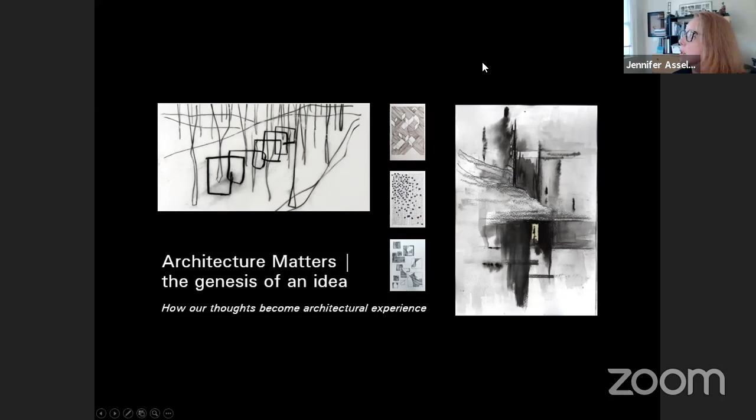So with that, I'm going to turn this over. These are my image credits, because in architecture, it's always important to make sure that you acknowledge where your sources come from. With that, I'm going to turn it over to my partner and colleague, Doron Serban.

Hey, everyone. So this question is kind of a loaded one. It's both, what do you think you need for tonight, but then what do you think you need when you are practicing architecture or doing architecture?

So Jennifer, if we go to the next slide, this is what everyone kind of thinks is required, which is this beautiful set of tools. And you've got all these different pens and pencils and sketchbooks and markers and stuff that can cost a lot of money. Some of it looks like it's homemade, but in actuality, yes, these are great things to have, but they are completely superficial. They're unnecessary. All you really need is something to draw with and something to draw on.

If we go to the next slide, you can see that this is the other kind of myth of architecture, that you have to be some fantastic artist. There are many architects that can draw well, but not all architects are beautiful artists. And really what this talk is about is showing you that the formulation of an idea, the way you put down your thoughts onto paper and that they're exploring something, is much more important than producing a beautiful sketch.

So whatever tool you have in hand is useful. I grabbed a couple that I have on my desk right now, and you'll see that in grad school, I was forced for a long time to use a fountain pen, even though I worked for Autodesk. They're like, no, you have to do fountain pens. I like to carry this giant marker around because sometimes it just forces me to draw in different ways, or a pen, pencils. I have drawn with food on more than one occasion. I'll draw on too many surfaces.

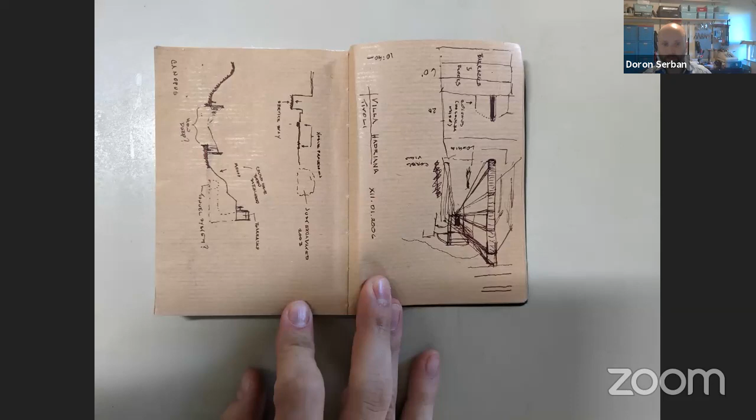Sometimes I wouldn't have the same tools. In this case, one of the things I liked about fountain pens is I can get my finger wet and then start using it as a fill. If I wanted to highlight something, I could use a different color, so I would carry around some colored pencils. I liked using brown paper at different times because then I could play with getting darker or lighter, again forcing my brain to think in different ways.

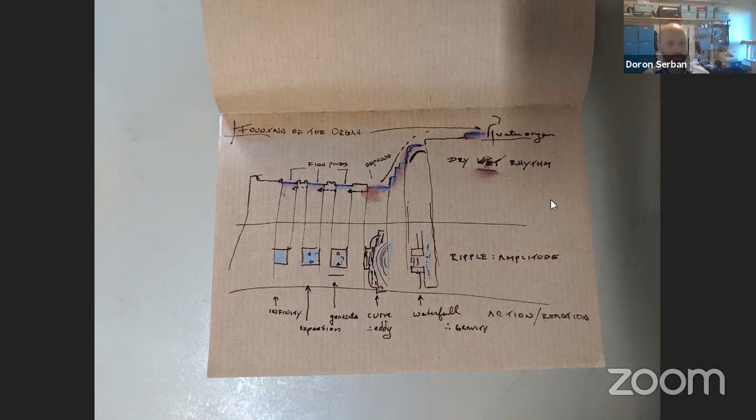All right, and this is kind of the quintessential architectural sketch. In some other professions this might be a mood board or ideation, but for us this is really showing someone's brain going on overdrive, trying out different ideas and filling in every square inch of the page trying to figure stuff out. I love this because you see the different ways shading happens - some horizontal, sometimes it's like, I don't have time to draw everything.

This is an anonymous image we found, not any one of our personal works, but we get a sense of the attitude, the interest in overlapping ideas that aren't necessarily clean. You can see the person drawing over things - they're uninterested in making things look very clean and very perfect. They're much more interested in getting the idea down and really understanding an idea or a topic.

All right, so that is to say - I hate the word pretty, and I always ask my students to avoid using pretty or beautiful or nice, because it doesn't mean anything. It's not a conversation. You can like it or not like it, but there's no way to have a conversation.

Instead, what we want is something that's productive, meaning you have a question. The drawing is meant to explore the question - is it moving us forward? A productive drawing is one that gets you closer to understanding. Now the understanding might be another question, and in most cases it usually is, but that's what makes it exciting.

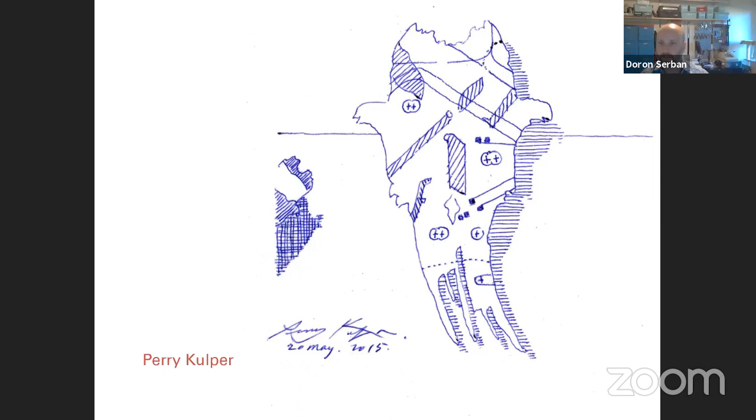Okay, so I'm going to change my tone - going from super hyper excited to see you guys to kind of much more therapist style. So go ahead and relax. It's the first thing - bring your energy down, excitement up, maybe find some way of doing that. Grab whatever it is you want to draw with, and something to draw on. Let's just explore, let's see what happens.

All right, so we're going to go through a series of 12 exercises, and there is no right or wrong. If you have a question about it, just use your instinct. Remember, it is literally impossible to do anything wrong other than just not draw anything. So even if you draw something you think is completely wrong, no one's going to know - it's just between us, so don't worry about it.

And we're going to spend about 60 seconds for each one. So the first thing we would like you to do is draw a circle - easy enough, but you can only use up and down lines, so vertical lines.

You're going to have 60 seconds to do it. In some cases it might take you 3 seconds, and in others it might take longer, so it's kind of that gauge. But if it does take you only a couple seconds, go ahead and try to do another one, and try to do it differently while still doing the same thing, and see what you get out of it. You guys ready? All right, we'll put 60 seconds on the clock and go.

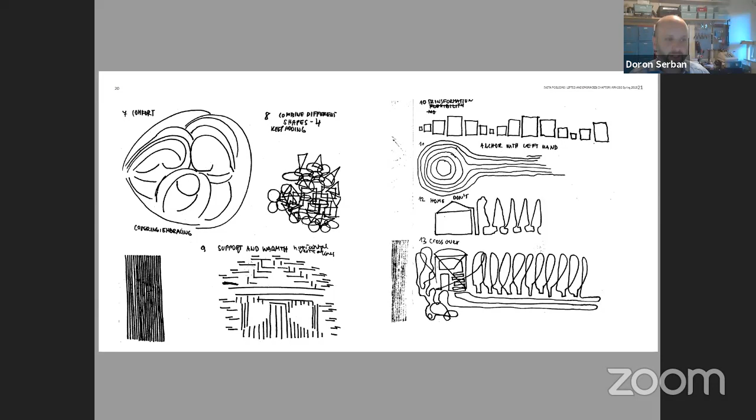What we wanted to show you guys is a couple examples of the same students we showed you earlier, but this is kind of how they work through their ideas. And in my studio, what I find always interesting is you can tell a lot in the drawings. In this case, I believe this is Iveta. She has a very strong, what we call a strong line. She doesn't have a lot of little choppy repeats, but the lines she draws, especially that bottom left one, is talk about confidence. She's drawing it down, there's no hesitation. And then I love the way she drew comfort, this idea of kind of almost enveloping. I've never seen anyone do the home that's not vertical when they do this exercise, a little house with the trees.

And if we jump over to, I believe this is Connor. Now, Connor is a very inquisitive guy, but he's also very self-conscious about his drawing, and you can kind of see it in the drawings. They're very, very squiggly, very uncertain, they almost feel rushed. And the one in the bottom right, when I start to look at this, the therapist in me comes out like, why are they crossing in some places and then not in others?

It's almost like his brain is moving faster than his hand. But what I also found interesting is he literally drew the anchor with his left hand. This is DJ, and DJ, as you can imagine from this, is not a scatterbrain.

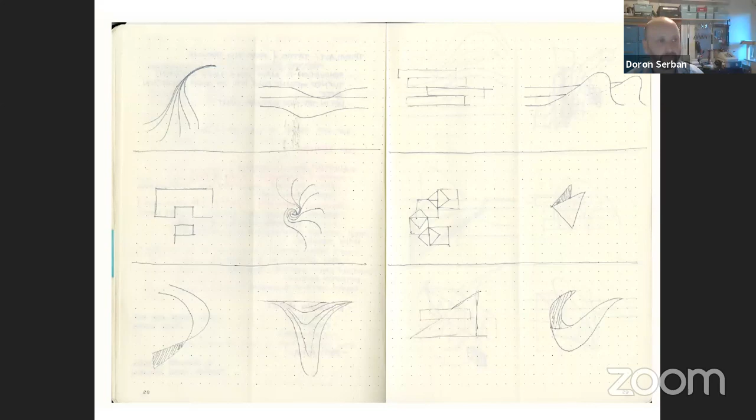This is someone who's very methodical, very cerebral, very much about using the grid. Every drawing I'm fascinated with lines up perfectly. You can even see the sketches behind on other pages where it almost looks like these are just facsimiles. The drawings behind look just as lined up and perfectly symmetrical. It's almost as if he did this in a computer. But this is his sketchbook, and his whole sketchbook is filled with this.

So Jennifer, if we jump to the next slide. This is a little later in the semester, we start to do these more and more as a kind of design exercise to get students both to relax and to draw and to think through drawing.

And then if we go to the next one, all right. I think you guys can hear me now.

So the big question you might all be asking - you can actually relax now, you've done it, hooray. Somebody said their brain is aching, and I can appreciate that. But now you can relax and sit back. I'm guessing that for some of you, you have a little bit of experience, whether in an art class or a beginning design class from your previous education, maybe a graphics class. Some of you may be wondering, what in the world does this have to do with designing a building? So the first thing I want you all to appreciate is to really question what it is that you were doing.

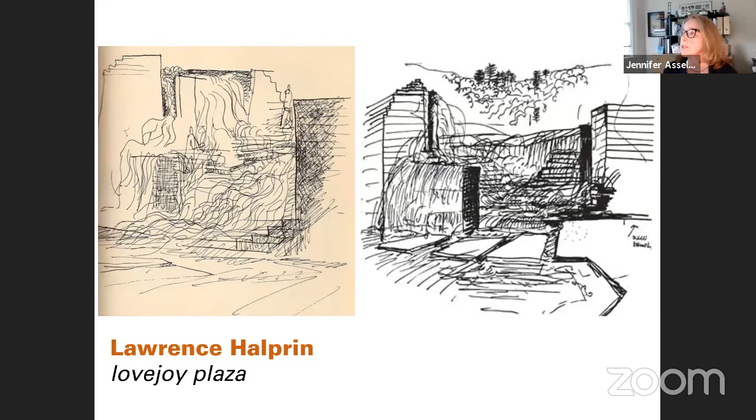You see this sketch. Both of these sketches were the beginnings of Lovejoy Plaza. You see some things that are very tangible, something that relates to some kind of energy, maybe water, we're not sure. You see sketches and something in the background that maybe relates to the place and location. This happens to be in Portland, and if you know Portland, Oregon, there's green hills, a lot of trees around the city. So these were his initial sketches, I kid you not.

And this is what was designed. We can see that in his experience, his career probably covered 5 decades, maybe 6. He could imagine something that took the landscape that existed, the materials from the hills around Portland, the idea of something natural, the rivers that flow through Western Oregon, and created in a very urban place out of very man-made materials. It is not a part of nature per se, but it's speaking to nature. And it all comes through that initial sketch.

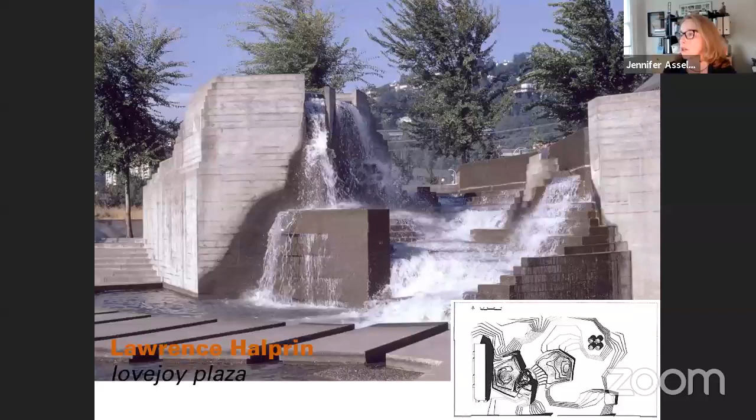The little lower right-hand corner, I couldn't help but add, because this is actually a very different kind of drawing. If you've worked in architecture, you recognize it as a plan, specifically a site plan. It's a very different way of drawing, much more abstracted. It's the kind of drawing we do when we want to get something communicated, built, measured. It starts to describe how something might be built and how large it is, but it doesn't necessarily describe experience.

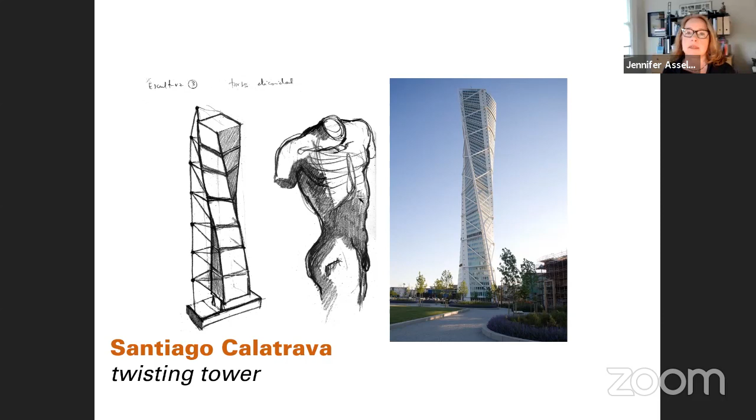Santiago Calatrava is an engineer first and foremost, and then he became an architect. He designed bridges, and then those became tall buildings. In this one, you can see quite literally through this transformation of sketches what he was thinking. He's using the body as a metaphor. We often do that. Many times we think of the body first, whether it's in the scale of our body, or in this case, in the explosion of scale, as the body is the skeleton. And in this case, it's a turning torso. The turning torso becomes the kind of skeletal structural frame for the building that becomes then this very significant tower.

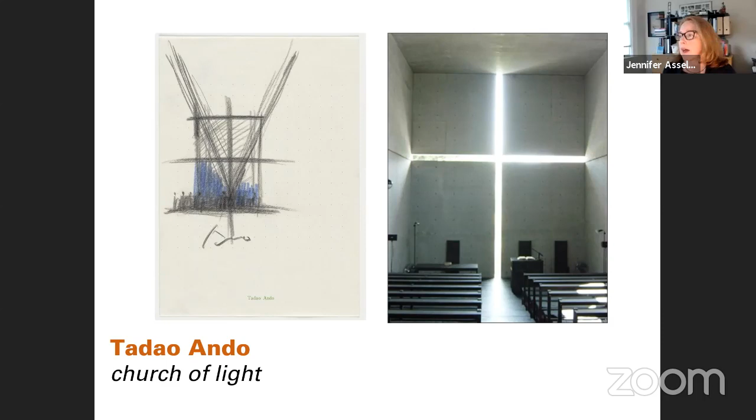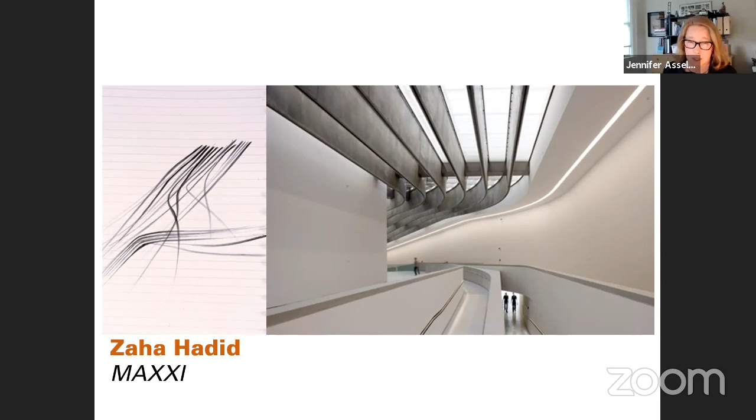This is Zaha Hadid. I'm sure you've heard of her. She was a mathematician first before she became an architect, but the lines on the left, her idea from the Maxxi Museum, don't belie that idea of her mathematical mind. What they share is this idea again of space and movement in space. She was constantly pushing the boundaries of architecture and structure and calling upon materiality and structure to do something that really buildings had never done before she came on the scene, shall we say.

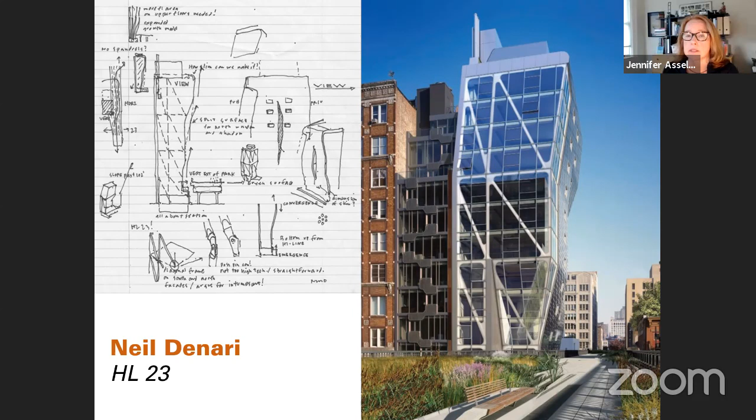And we're back to the sketchbook again, not necessarily leading to another project, but the book that Doron keeps holding up, the pages we keep showing you, this is personal. Your sketchbook is really personal, and it's not necessarily always something that's going to be on display in a lecture. It's going to be your process to get to something meaningful.

With that, I'm going to turn this back over to Doron. He's going to take you through a few projects, give you a little bit more of an idea about the process. How does drawing get us, get an architect, get a designer from A to B?

Thanks, Jennifer. So if we jump over to the next slide, it'll give you a quick thing. Toyo Ito is a very famous Japanese designer, and one of my favorite buildings of his is the Sendai Mediatheque, which when you're in school, you will see a lot. And there's a whole history for why he did this.

But this initial sketch, or series of sketches, really talks about the idea that the Mediatheque is a combination of three things: these tubes, floor plates, meaning the individual floors, and then this idea of infinity or information. There is no facade, no skin to the building. It's just glass, but it almost becomes transparent.

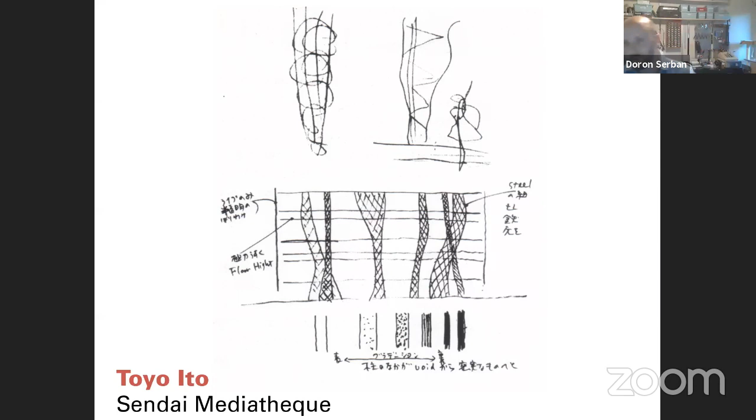When you look at the top sketches, we get this sense of dancing. In the middle, you start to see this idea of tubes that are almost like seaweed, but made out of steel. And at the bottom, we have this idea of gradient, or how do you understand them in different ways. He really saw this project as a flow of information, a Mediatheque, a new type of library or museum.

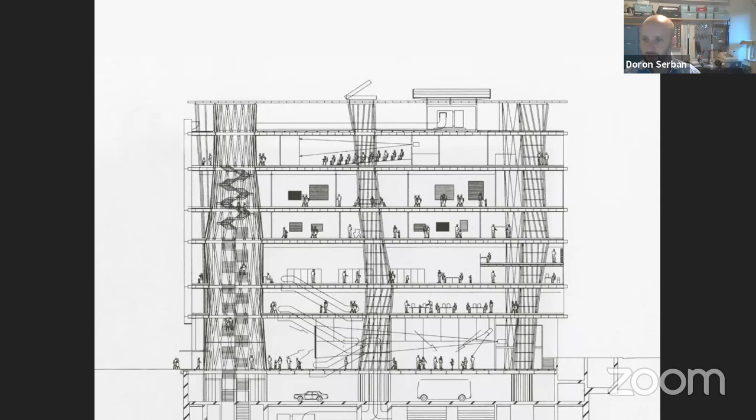So the different tubes are arranged such that there are 13 different tubes, and no tube lines up on any one floor with the next floor, meaning they're constantly shifting and moving. Some of the bigger tubes are transporting people, like elevators and stairs. Some of the smaller tubes are transporting information or mechanical systems. There's always this interaction of finding the least amount of stuff you need, and it almost feels like fish flowing through seaweed in the ocean.

So here we get to see the combination, or the culmination, of that. In the center, we see the glass, the window, the facade that has basically become transparent. By transparent, I mean the idea that it's not even there anymore—it's almost like it's disappeared. We see just how strong of a move the grid he uses for the columns is, and you can actually see through the building from the outside. You get these individual plates that go level by level, and the building seems to almost float or shimmy as you're looking at it.

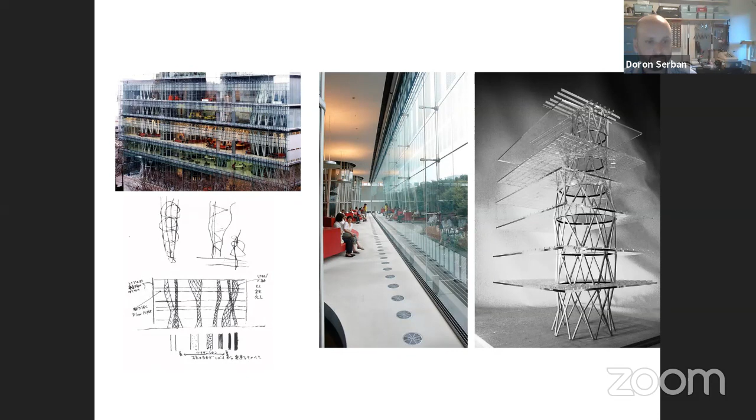Now, Brian MacKay-Lyons is a Canadian architect obsessed with the idea of vernacular architecture, which is architecture of the place. He is in Nova Scotia, on the far east of Canada—it's actually a different time zone than New York, that's how far east it is. His family has had a farm there for 400 years, and he says there's a very strong culture of shipbuilding.

What does that mean? He looks at the typology, meaning the styles of things—in this case, the barn—and the fact that the barn has, on the one hand, a very recognizable A-frame shape. We get the side and then the diagonal. But when you start to look at the detail inside of it, it's actually quite distinct. There are different ways of expressing a window or a door and where they line up.

And then there's the question of the materiality of it. The other thing that's really big in this culture of the vernacular in Nova Scotia is shipbuilding—there's a long history of it. So how do we use materials? How do we use techniques that are honest to the place?

He has this thing he's done every year for now about 14 or 15 years—some years they take it off—which he calls the ghost studio, where a group of architects, primarily architecture students, go there for two weeks. Then you design and build one of these structures in two weeks.

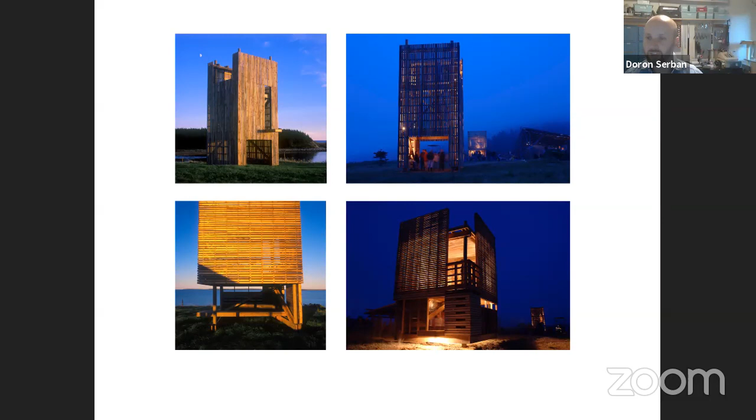Along with the shipbuilding and the barn—which you saw for a brief second on the last slide—there's a strong history of the lighthouse. Now, every one of these projects, and you're seeing here a series of sketches, MacKay-Lyons, the one I mentioned in the beginning, only draws with Pentel sign pens. He's obsessed with them and won't let anyone in his office use anything else. It's very strange, but he is a master at being able to capture the idea in a sketch.

Whether it's a barn or a loafing barn on the bottom left, one of the things I really like about his drawings is they're not precious, but they capture an idea with very few lines. He's not trying to make these look pretty, but he's developed a certain language that translates from these rough sketches all the way into his finished work.

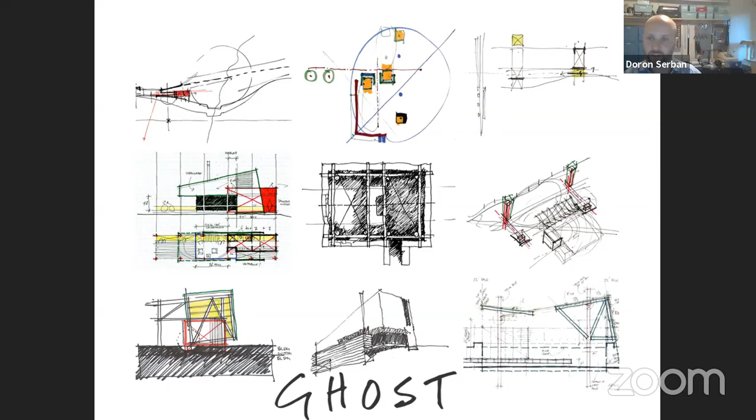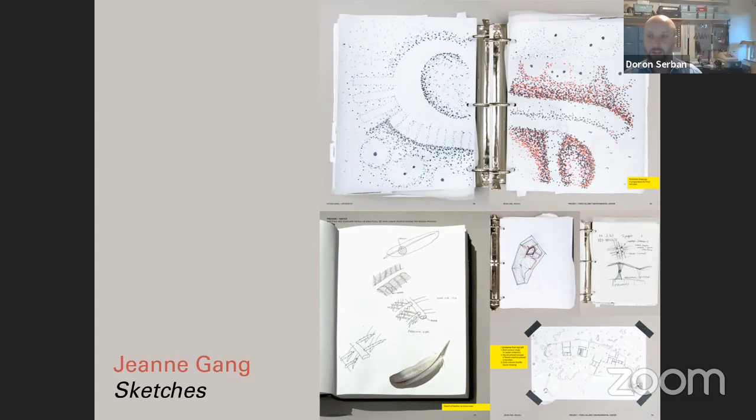Jeanne Gang, or Studio Gang, has a book called Reveal that shows all these sketches, and she's always drawing and working through ideas. In this case, they happen to be quite Da Vinci-esque in exploring different ideas, but you can see they're not precious. They're just kind of in spiral binders, and some are in different sized notebooks, whereas McKay Lyons is obsessive about using a single pen.

Which, Jennifer, did you want to chime in on? You're much more familiar with her work and her projects. Oh, you're still muted. Yep.

She's trying to capture, and you really see it in this drawing, something that perhaps can't even be named. Whereas the vernacular architecture that Brian McKay Lyons is doing is very clearly linked to something specific, something physical, something that exists in time. There's a very clear equation between what he's looking at and what he's translating it to.

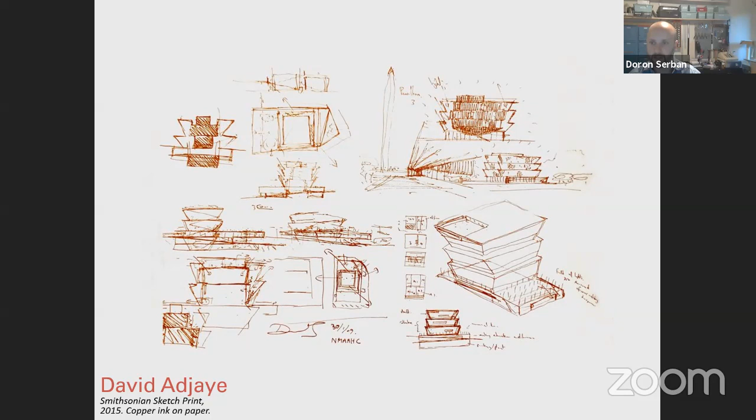One of the fun things as students, and even as academics, is we like to reverse engineer some of these things. It's great to look at the final product, but to really see not just how did they get to this point, but for me a much more important question is why. Why did they make the decisions that they did? What is driving them? And how does a project like this, meant to capture the history of African Americans in the United States, find its place and capture such a radical history?

As Jerome mentioned, David Adjaye resides in England, but he's originally from Africa, and it's been an amazing opportunity to have him come to America and be part of this project.

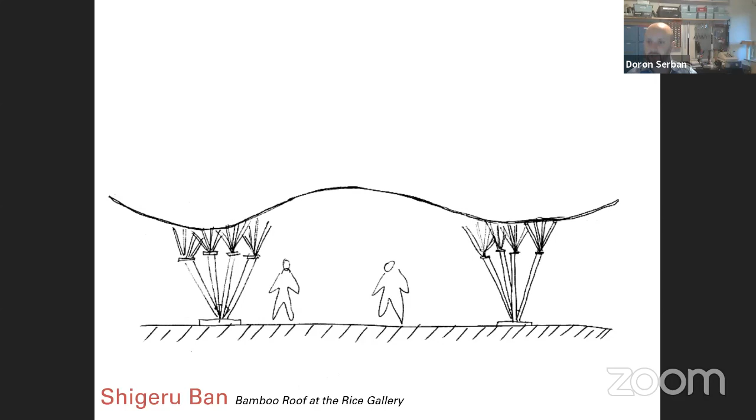So then when we jump forward and we see this, done at Rice Gallery as a design build project with students, you really get this sense of almost the weightlessness of the wood surface that is being held up by these very strong metal components. One of the things I find fascinating is I first learned about this project through those drawings, so my brain was immediately looking at those connections, knowing what Shigeru Ban is interested in. Whereas you might just focus immediately on the curve and the smoothness of it. So he's really playing against this idea of how do you define an object through its material.

He also was quite famous for doing emergency shelters using very humble, vernacular materials. He's been very interested in making sure that people caught up in some of the most tragic events of the last decade were housed after the event, were taken care of. The Fukushima nuclear plant disaster that came after the tsunami in Japan, he became very involved in the problem solving of how to house so many people who lost their homes in that earthquake and tsunami. He actually won the Pritzker Prize, I think in 2014, both for his elegant architecture and for his humanitarian approach to the culture of his own country.

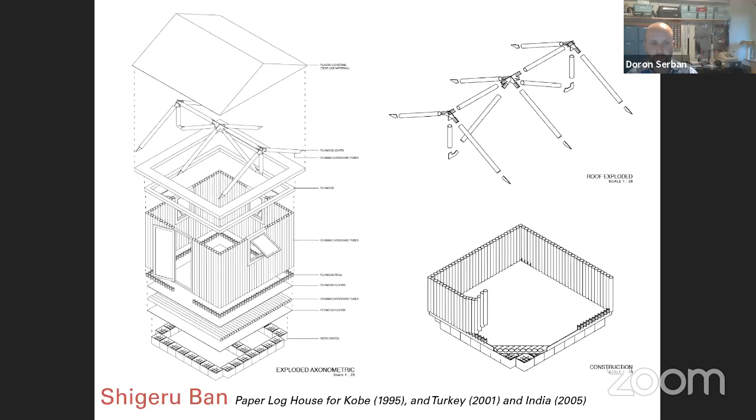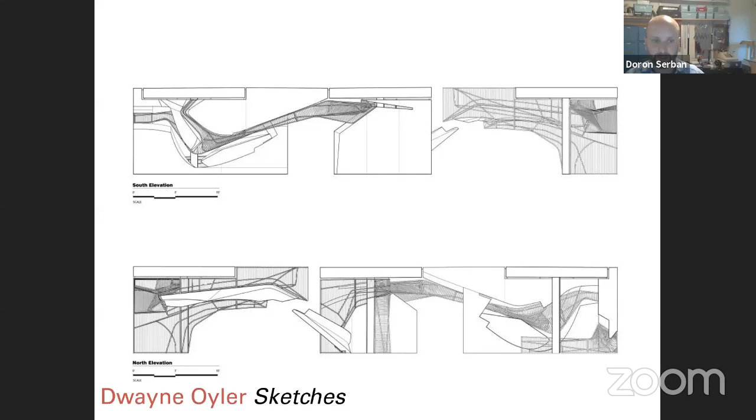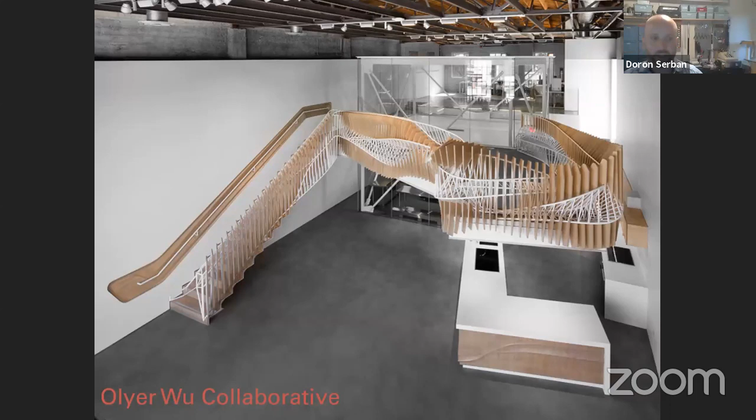Now, this is their 3DS culinary lab that they designed, for a now defunct business where they were 3D printing sugar sculptures. So it was kind of the research lab. They asked Oyler Wu to explore the idea of digital technology. There was a question from Atish about using 3D, and something like this is absolutely designed in 3D, using both additive and subtractive processes, meaning carving things away, but then also adding. 3D printing is additive. You're adding stuff, almost like clay.

All right, so now, we didn't tell you this before because we didn't want anyone to be scared. There's a tool that we use all the time, and in the past few months with the quarantine in place, this is super useful. It's this device called Concept Board, an online platform that literally lets us create a nearly infinite whiteboard where we can place stuff. I had a meeting with a student this morning where we're just popping stuff onto there. We can all see it in real time, draw over it, and add images and so forth.

So what we thought would be fun, since we couldn't see anyone else's sketches other than Reed's earlier, is we wanted you guys to upload whichever sketch or sketches you want onto Concept Board. Pick the one that gives you the most amount of joy, or the ones. You can go with more than one, but pick the ones that gave you joy and pleasure when you were drawing it or when you stepped back and looked at it.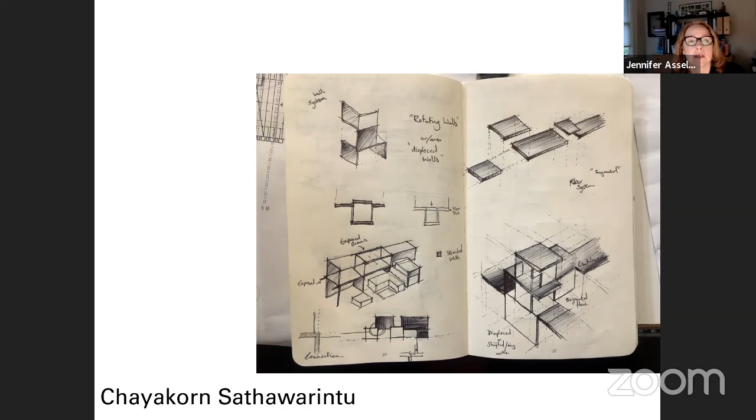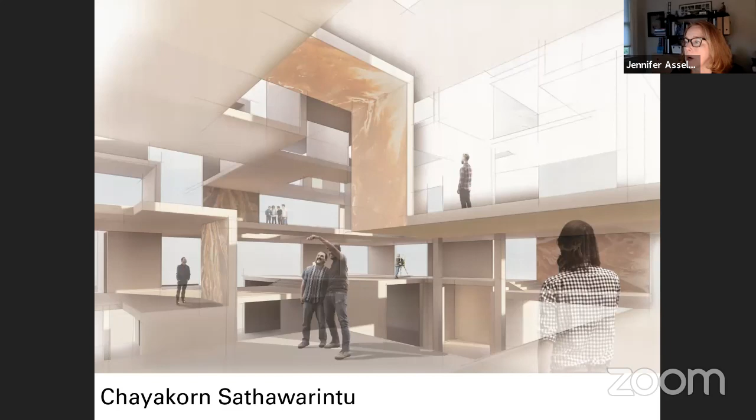So this is Chaya. Again, we're back to the sketchbook, except this is the sketchbook for a student. This is his sketchbook that led him to these images for a 4th-year project based in the city of San Francisco.

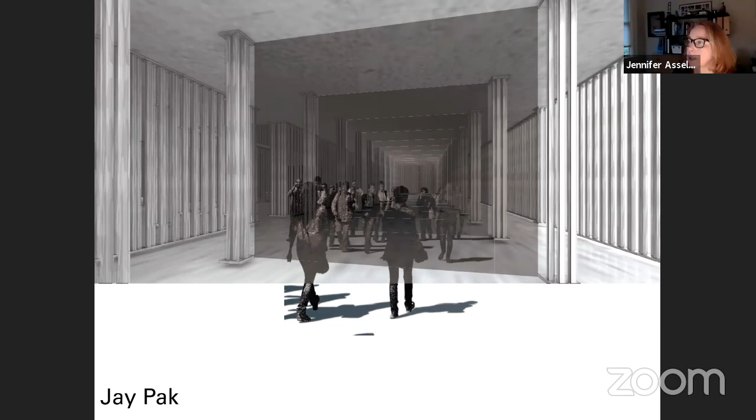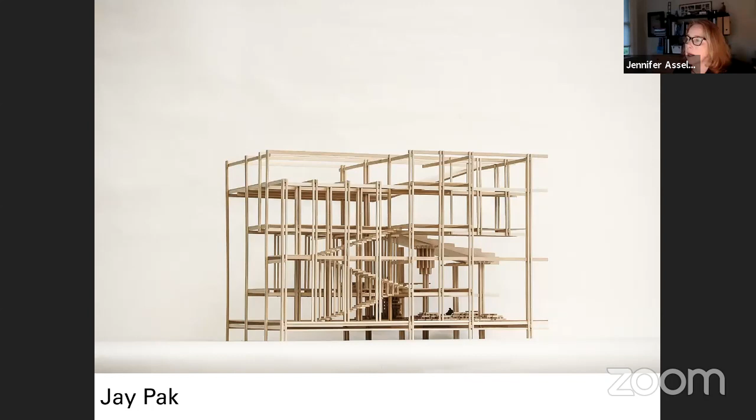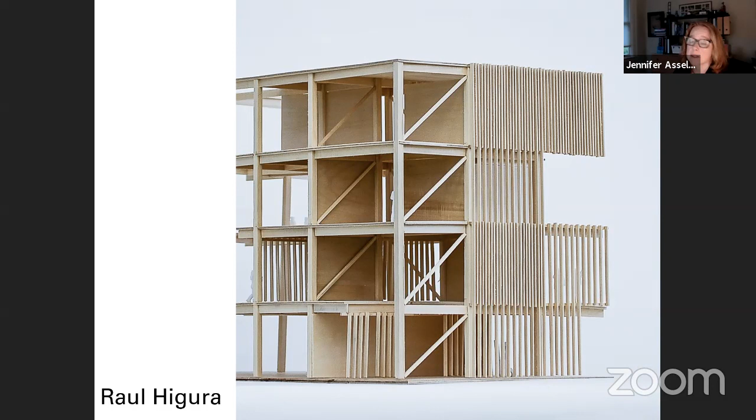And then this is the project he developed from that model. Again, I'm literally plucking the imagery out of the projects—I'm not showing you the plans, I'm not showing you the sections.

Those are all really important in all of our studios, plans and sections. We're not always looking at 3D. Sometimes we're looking at the use of plan and section to commit to the idea. Somebody was asking about how we use this idea, the meaning of space, to think about flow and circulation through space. That's exactly what we're talking about. When we look at plan and section, we're looking at how we create meaningful spaces as people move through them, whether horizontally or vertically.

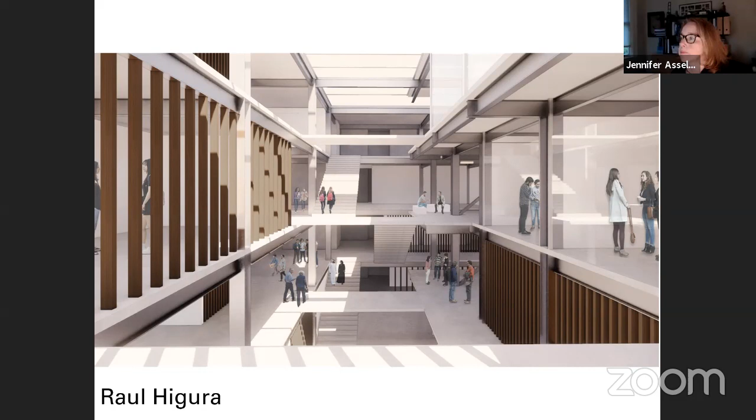Again, another sketch model, a little 3D sketch model using transparency and mass. And this is the project that the student generated. This is a sectional perspective of that.

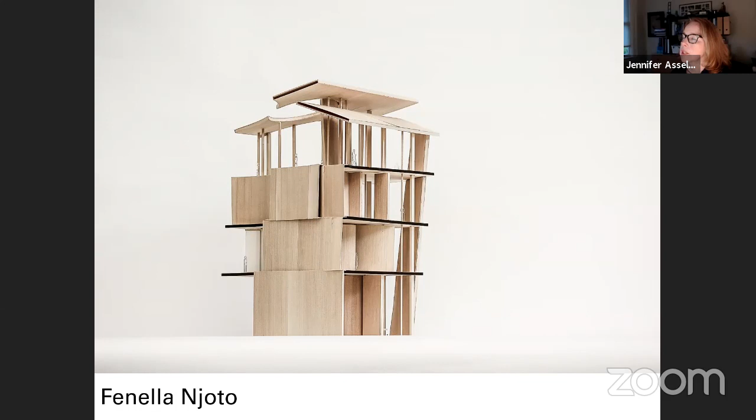And one more model, Fenella Njoto's. So you notice she's starting to introduce some curves into this project, and then those spaces, those cutout voids that she creates, became a music space in her project in San Francisco.

So this is our 4th year work. It's not the end of the 4th year. I went through one of the studios that I thought was most expressive in the imagery. But the next and last segment of our presentation is really what our students are doing as they develop their thesis projects. So thesis is the final year of the B.Arch.

I always call it the leadership year. There's a lot of things you have to check off as part of our accredited degree. But when you get to your final year, the 5th year, the last 30 units, this is time for leadership. This is time for people to take responsibility for what they actually choose to do. It's time to think about what you want to be doing when you graduate, what you want at the front of your portfolio, and also to start thinking about who you want to serve as an architect. So we have two avenues of choice that go back to this idea of architecture matters that are really important to me.

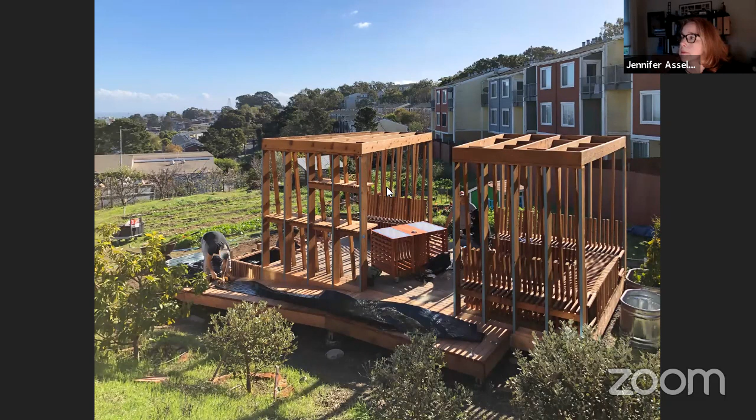The first avenue of choice is something that might surprise you. We have a community design build studio, and it goes under the name of B Lab. Students in 2019, starting at the beginning of 2019, actually designed and built this garden pavilion for an underserved community in Hunters Point area of San Francisco.

This looks like a rendering, and I promise you it is not. This is just a really professional photograph of the pavilion hours before it was finally finished in December of 2019, before COVID, obviously. So this was the client.

This was a group of volunteer gardeners who had a beautiful garden literally overlooking the San Francisco Bay. They had some money they had been able to get as a grant, but they didn't have the facility to use that money. They didn't have enough to hire a contractor, but they had enough money to buy the materials.

Our design build team, the two students on the right, were part of the team that came and worked with them. There's the San Francisco Bay in the background and some of the students on the left. So they came and looked at the site and looked at what could be done, and they spent a lot of time talking to the clients.

So one of the most important things we develop in our community design studio is the importance that it is not about us. This is about the community. This is about how we are listening to their needs and how we're translating those needs into visuals. And again, we turn to all of our tools.

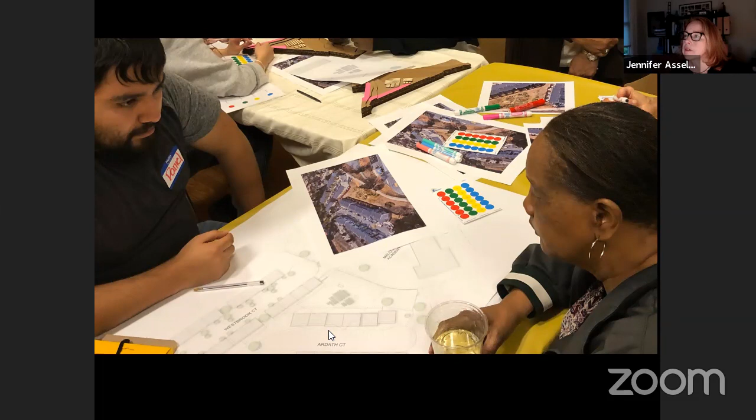You see the drawings in front of our student Daniel there. And then the sketch models, I think the team, there were 7 students on this team, did about 12 different iterations of the possibilities for this pavilion. It was never a slam dunk, and it kept going back to the client to get their preferences.

We had to keep budget in mind. We had to think about what materials we could actually use, because we're just a team of students. We're not going to be able to fabricate stainless steel or necessarily pour a full concrete structure. So with that, this is one of the early models.

With that, they were able to complete in a full year from design through fabrication that started in the shop. A lot of these pieces that you see were fabricated in our wood shop at the architecture school, then taken out to site in the fall. So spring was design, summer was shop fabrication, and fall was on-site work.

These images were taken relatively recently, but before COVID. I think some of these go back to January. This is most of the team and the client at one of their decision-making meetings.

This is another project from the B Lab, called Kit of Parts, currently underway. It's an imagination space and a community space between buildings, in an outdoor space. It started when our students did a mural in this same housing development a few years ago, about 3 years ago. We maintained that relationship and were invited back to reconsider an open space that's underutilized for children, families, and gatherings. It can't be a playground—playgrounds require a lot of specificity because of health and safety rules, and we're not experts in that. So it's really a set of modular furniture still based on the idea of education, play, movement, and gathering.

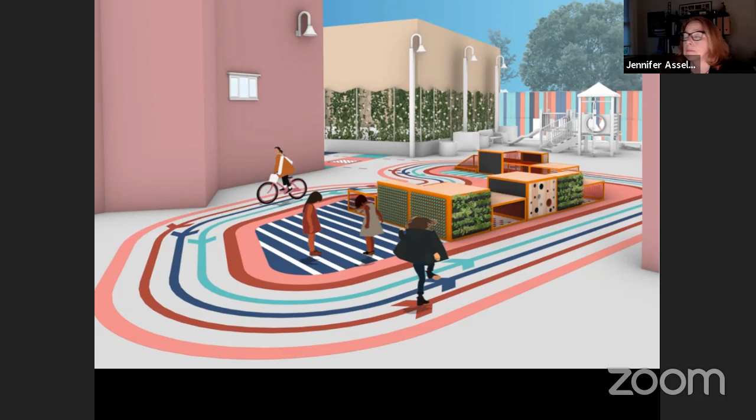The students have completed the design. They got kudos from their clients, and they're now raising money. If we can, we'll be in the shop fabricating this.

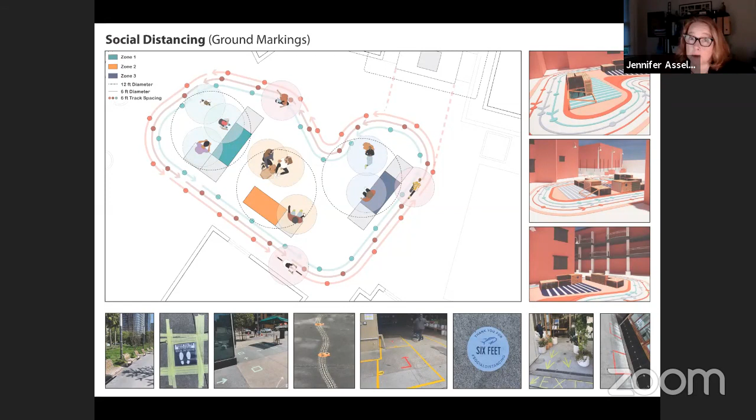As you can see, it's highly collaborative. We gather information from the client and keep going back—the client was children, families, mothers, fathers, and the coordinators for the programs there, at Bayview Commons. We even developed diagrams of how social distancing would work. The modular furniture we're designing is movable, so we can accommodate the new conditions happening on the project.

The other alternative is Thesis Studio. This is a little more typical of what you think of when you think of the final year of a BArch degree. It's where students set their own course and decide their own project. They work with studio faculty who guide them and give them the kind of framework we expect, but every student designs their own project and develops the research first. There's a semester of research to understand the site they've chosen and the potential clients that might be there.

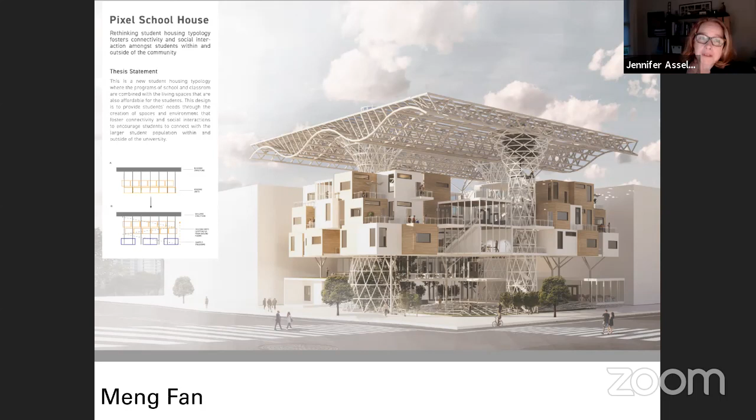These are hypothetical clients, but this project wasn't too hard to make hypothetical because it was designed for student housing, so all architecture students can imagine themselves being the client, being the user in a project like this. You can see it's borrowing from ideas of Toyo Ito's Sendai Mediatheque—it's looking at modular arrangements of space, creating the ground space open for the public. There are some beautiful drawings that go along with this project, spaces on the inside, spaces on the outside.

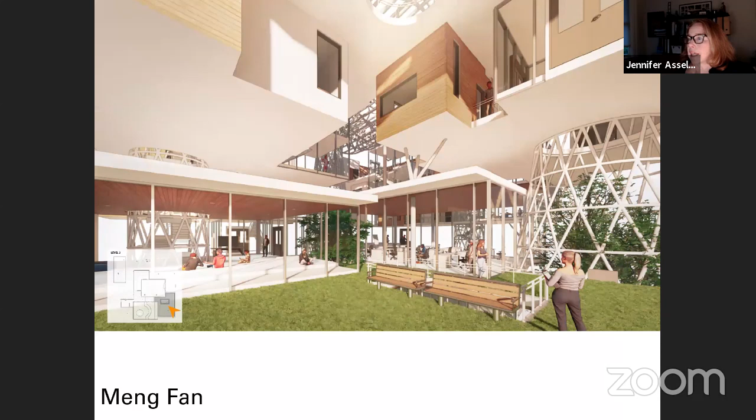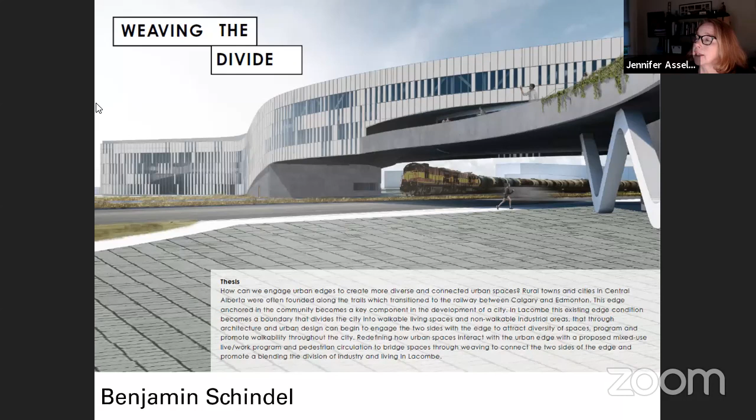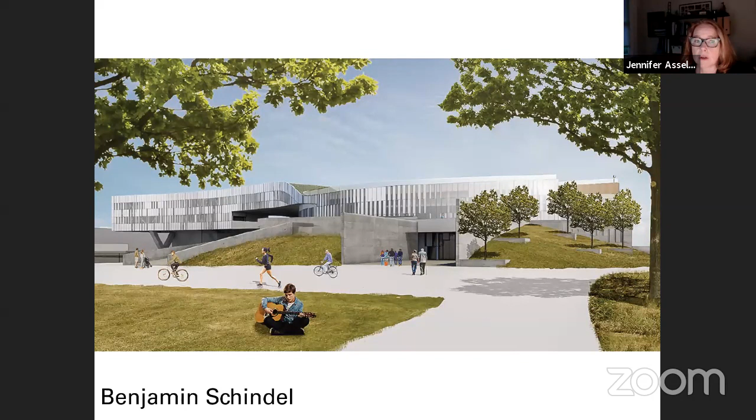The next project goes way up into northern Canada, a town called Lacombe, way up north in Alberta. The student has been online for his entire career in architecture, and he felt that what was most important for his city, for its robust future resiliency, was a tech building that would house new industries. But it also crosses over both the highway and the train that cuts through the center of his own city. This is really a kind of allegiance to the place he's grown up, where he's lived for 2.5 decades of his life. We're really proud of this project.

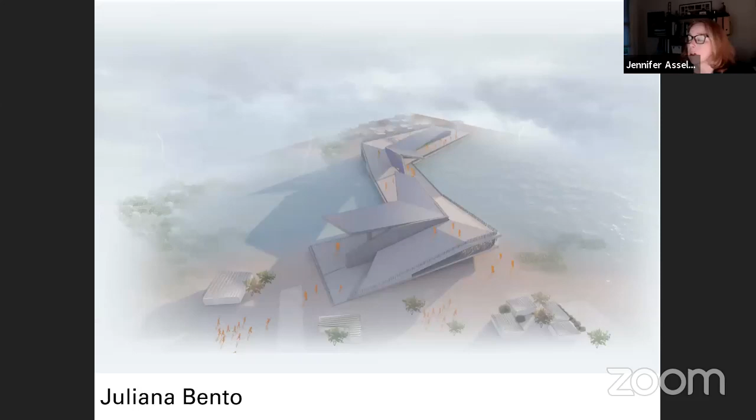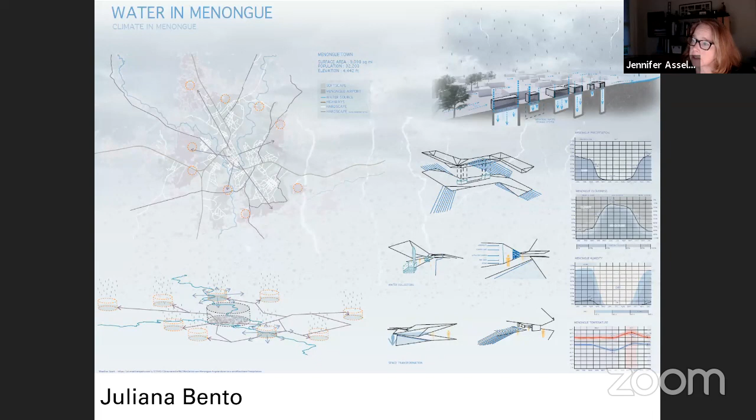Now on the other side of the world, this is Juliana Bento's project for Angola in Africa. Her project went through many iterations, starting from research into how an architecture project can gather water—it's called Path to Water. Water is a resource that's very hard to maintain in Angola; it's very precious. So her project went through many iterations of how a building can capture the preciousness of this resource. She did a lot of study at many different scales, with diagrams and drawings that explain how the project works, how it becomes a collector of water.

But it's not only that—it's also an education space, a space where women in particular become educated about how they can better their lives and how they can improve how they take care of their families. So again, it's actually a resilient space in many ways.

It's thought of as a bridge across the water, the body of river that goes through the city itself. Notice bridge is a really interesting metaphor from many of the projects.

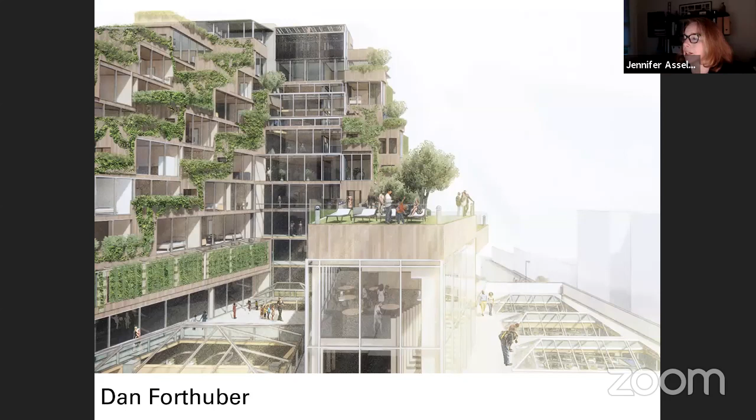Now we're in LA. Dan Forthuber lives in LA. He's committed to the idea that we need to house so many citizens that are homeless. He did a very thorough project of how we could take a very prominent site in LA, an existing building, and a new proposal for expansion of that building in a high rise, and house hundreds of people, quite frankly. Density is really important.

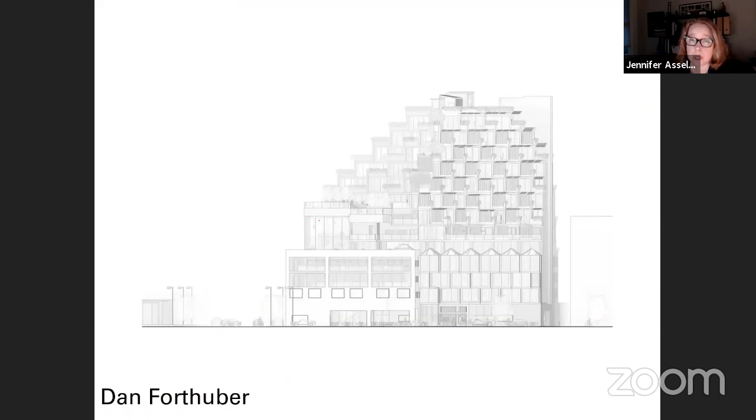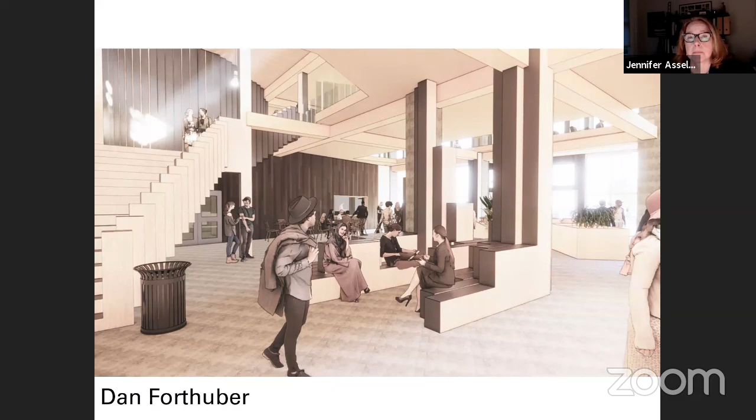Kenta Oye is a Japanese American. He looked at his own culture. His grandfather was in the internment camps during World War II and was a craftsman and an artist, and his work has been published. Kenta looked back at his own heritage and thought about how San Francisco has housed these incredible communities, really talented, really beautiful artistic communities over the last 100 years and more.

He looked at the immigration into the city of San Francisco and the diversity over the last 100 years. He looked at where Japanese Americans lived and what kinds of spaces were left behind when they moved and migrated to other spaces. And so he envisioned a building that was going to house the beautiful crafts, not only of Japanese Americans, but of the diverse artists that come to America, not just in recent years, but over the decades really.

How they could be housed in a kind of hidden space right off of Market Street, which, if you know, San Francisco is one of our main streets. So it's kind of the idea of hiding in plain sight.

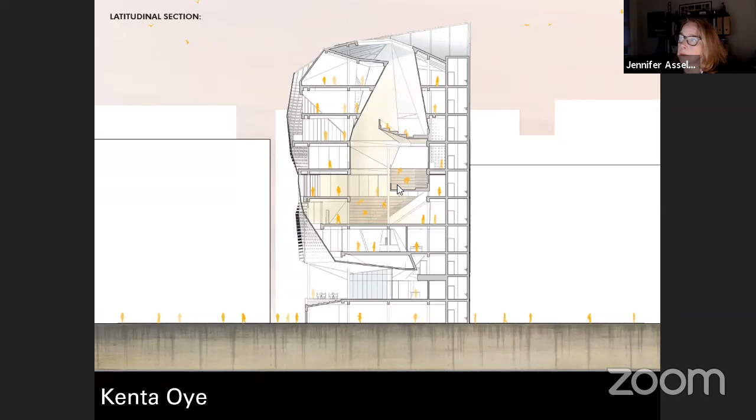This is the section through the building. The spaces that are in white are the workshop spaces. The spaces that are rendered in gold are kind of the public spaces that become galleries.

The front door isn't on the main street. It's actually through an alley. He turned the building around, so you come through a small alley to enter through the back. It's like a discovery, quite honestly, in the same way that you discover the crafts and the ways that might be lost if we don't maintain spaces to keep them precious and keep them moving.

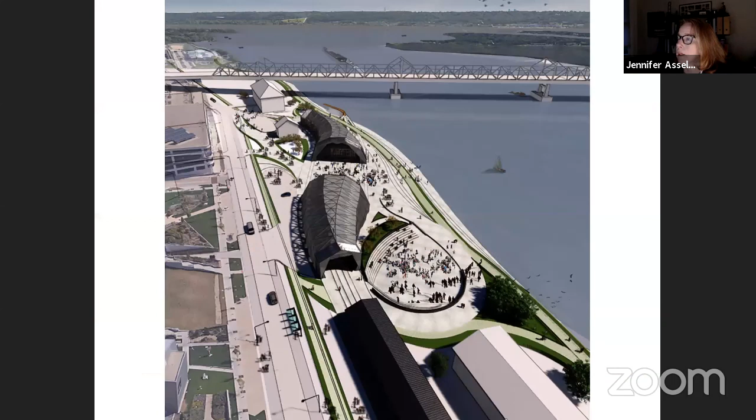And then lastly, this was the highest award given to a student this past spring. This is Nathan Linehop, another 100% online student. He lives in Peoria, Illinois. Nathan looked at the city of Peoria, the river.

Again, we're talking about water and resiliency. He looked at the fact that it floods so many times, and that the city is now at constant risk. He wanted a piece of architecture that would be a prototype for a barrier for the flood, but also serve the people of Peoria.

So he looked at something that actually moves, actually works, actually changes over time. It's both a building and infrastructure. It opens up and it closes. It's a single element that runs along the existing tracks and starts to close. He looked at projects in New York City that are looking at this kind of architectural movement.

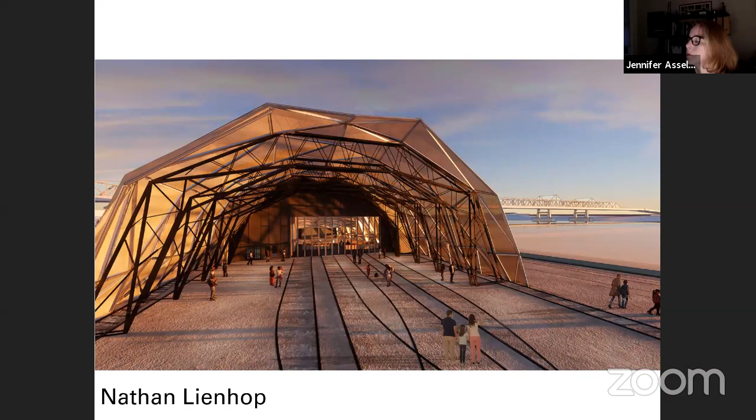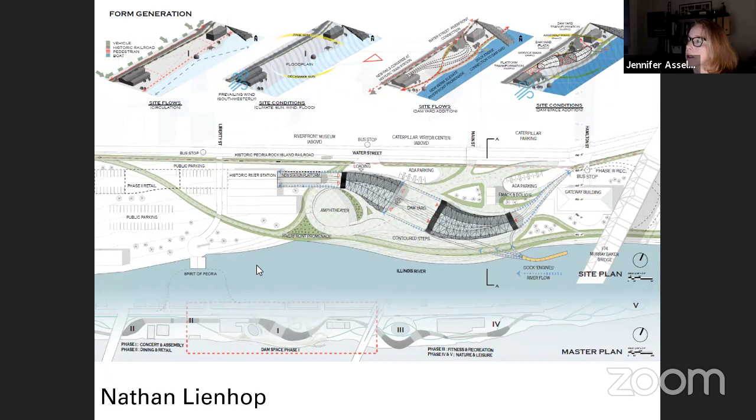And would light up at night, would become a closed space and a civic space. It could house events. It could house people who needed emergency housing. It could house the infrastructure. It could be a place where things are protected and stored, people are protected and stored.

So with that, I hope what I've tried to end this presentation tonight is that we are not just drawing for drawing's sake. We're not just designing for design's sake. We're not just designing as a fine artist would, but all of these drawings, all of the mechanisms that we use and the digital skills, of course, but they're actually meant to do something. They're meant to further our culture. They're meant to protect our citizens.

They're meant to create open spaces where we need more open space, and they're meant to improve our urban environment. We hope that over your education, you won't see this as just a mechanism to go out and produce floor plans and sections and Revit drawings, but actually to produce spaces that house people, spaces that serve, spaces that are meaningful, and spaces that you are really proud of creating, because that's what your portfolio can make a statement about. I didn't get into talking about some of the other projects, but sustainability is always at the heart of what we're doing.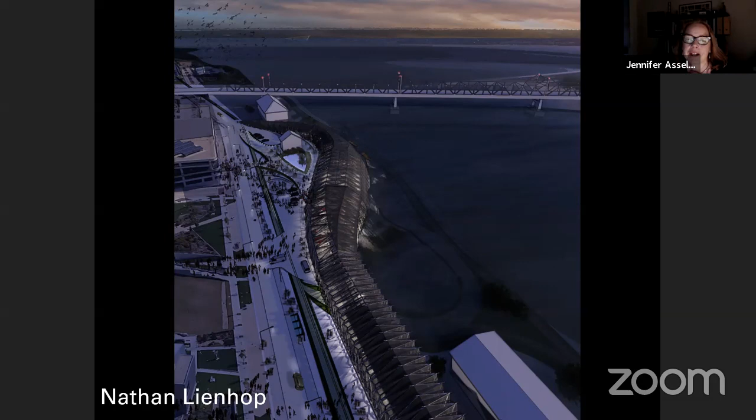With that, I think I'm going to turn it over to do the reveal. Doron, am I allowed? Yeah, it's ready to go. I'm just looking at the clock and seeing how we are with time. Do we have time, or do we want to go to more questions? Well, we can do both. Okay, so we'll do the big reveal.

And it is time for questions, so people can feel comfortable asking. I hope what Doron and I have done has inspired you. Reed and our admissions team are always open to answering all questions. We have 5 minutes till 9 — we'd expected this to take 2 hours, but Doron and I do not turn into pumpkins. So we're here to answer questions, but we're also here to show off your work.

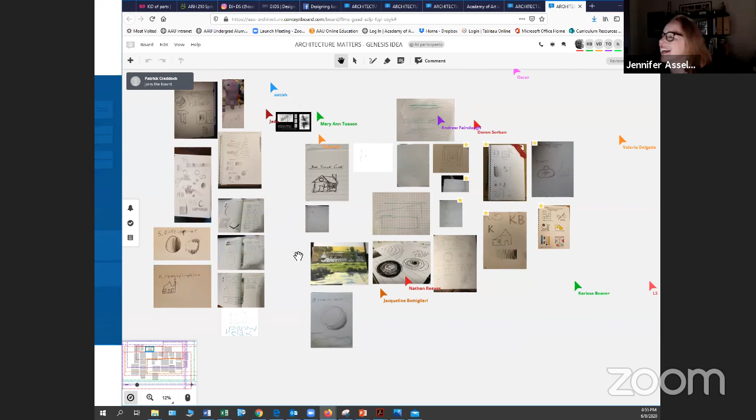Looks like we got about 20 drawings, maybe 30. It's fantastic. And they thought I was kidding when I said everyone gets a gold star for posting. See? What's funny is I'll do this in studio, and then next time I come into the room, everyone will start commenting on everyone else's work with stars and check marks.

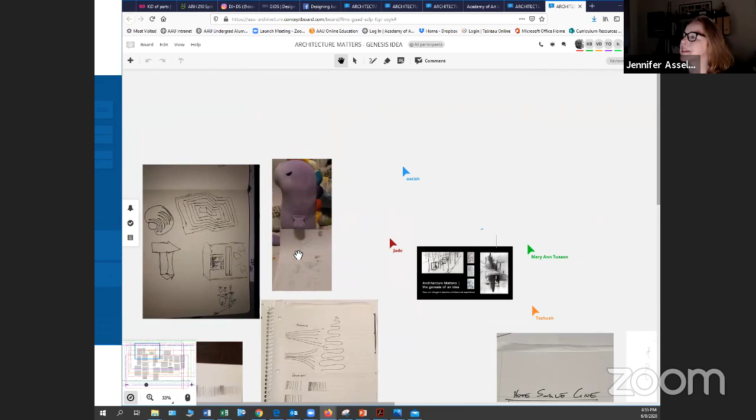So I'm zooming in, and I'm loving the images. I'm loving what you guys have around you as you're drawing. We see your circles and gradients, your initials done in different textures and lines, your home of a single line and your circle of gradient. That's great.

These are really interesting. I suspect there's something about comfort within that, and the home without the line leaving the page. You see the spreading, the idea of spreading. If you go to the bottom, there's something else that's really interesting.

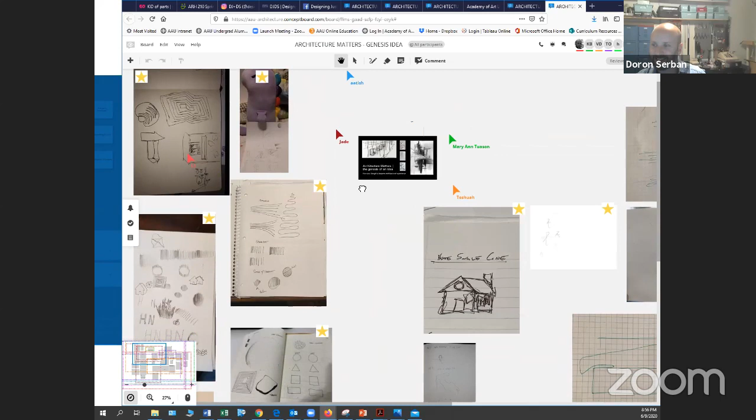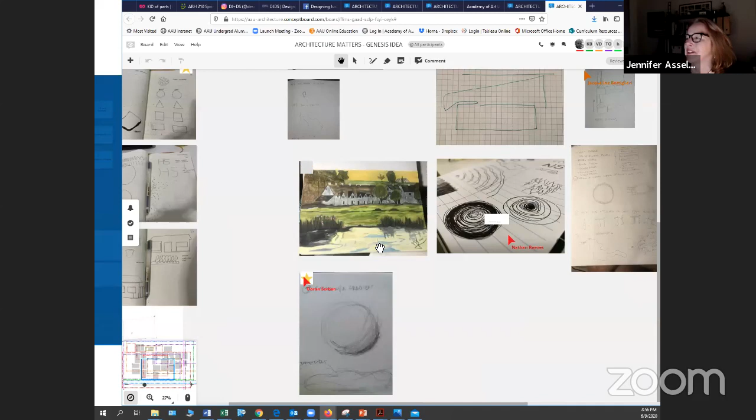So this is a doodle without a doodle, realizing how hard it is to write, in cursive or print, with a mouse. Anyone who's ever done an online class will know, or drawing online. I suspect this is Jacqueline's — this is what you did in another workshop. Well done, very inspiring.

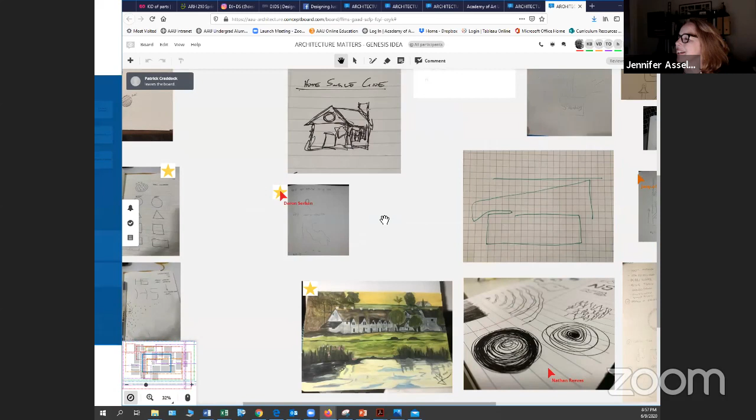I love the fact that the circles are getting a lot of white space today. That's fantastic — we could do an entire poster of just student circles. Squares within a square, the expanding square. It looks like a lot of people had a lot of fun. Ooh, we've got color.

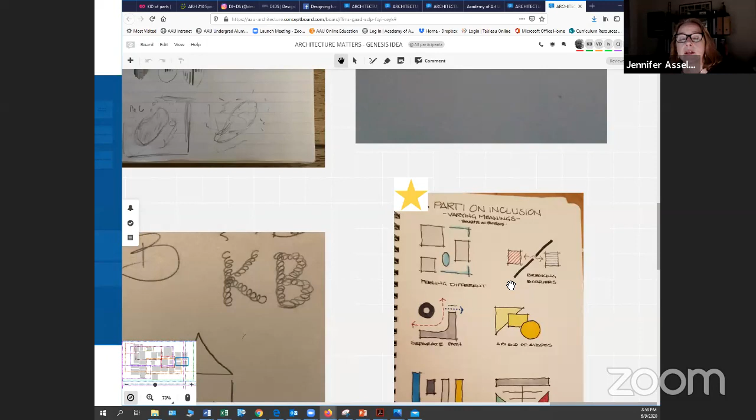Fantastic — a parti on inclusion, awesome. Inclusion is a really important term and concept, and an important way of life right now. It's something architecture is going to have to take even more of a voice in as we look at the spaces we design, to make sure they're not excluding people — whether that's people of color, people of disability, or people whose minds work in different ways. So I'm really glad to see that word on the board today.

Thank you, Craig Nelson. That's all right, that makes sense. Coach Craig T. Nelson. All right, so I see fire and warmth and comfort.

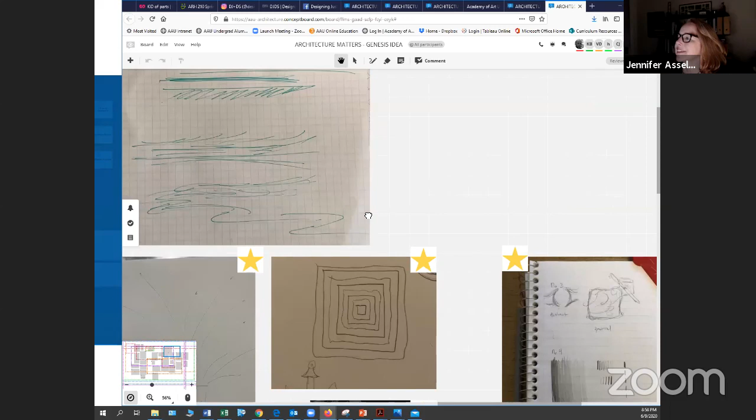I think we've toured up here — well, beautiful, beautiful lines there, loose and flowing. Spreading. This one's very small, but that's great — the iteration of the shape.

I wonder if this was always done with the left or non-dominant hand. It's very fun, it's very fluid. I love the overlapping — I don't know if that was breaking the rules or adding to them, but the overlapping is actually giving it quite an interesting layering.

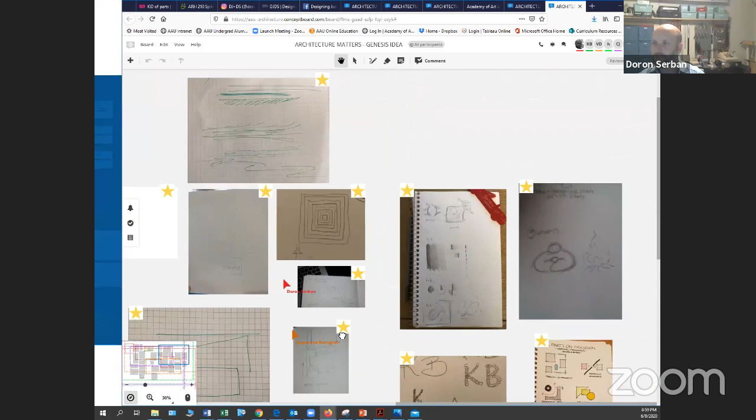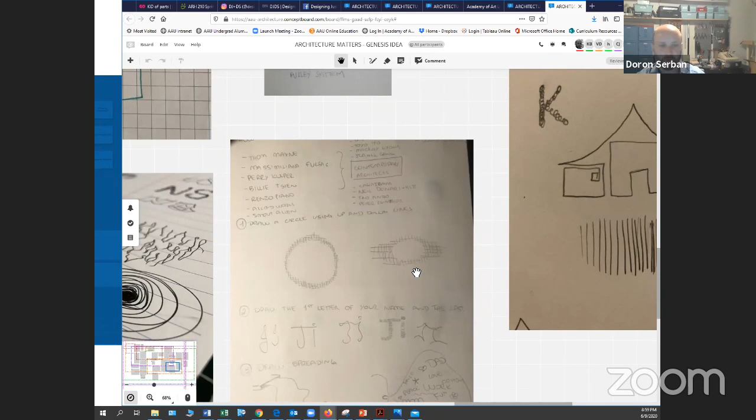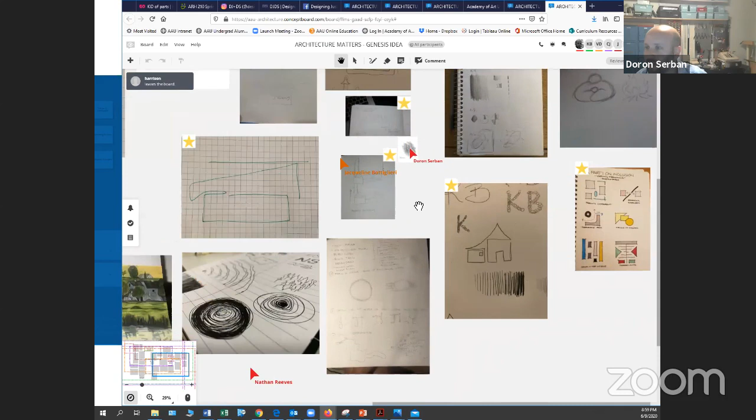One of the reasons we love this is we can start adding elements onto these boards as we're working. Right as you said that, I'm going to pop something onto that spreading one you're showing, to tie into — where is that guy? Oh, here it is. So if we look at that and pop over one of the Lebbeus Woods drawings — wait, come back. It's moving, it's uploading right now. That's not actually the image I selected for some reason — let's try it again. But it very much has this quality to it, from an initial sketch.

And so you start to see this language that comes up. It's almost a transformation. Or in animation, we talk about this idea of tweening, in between, where you see the steps. And that's why movies are called movies—they're moving images. It's a series of sequences that you see. Fantastic.